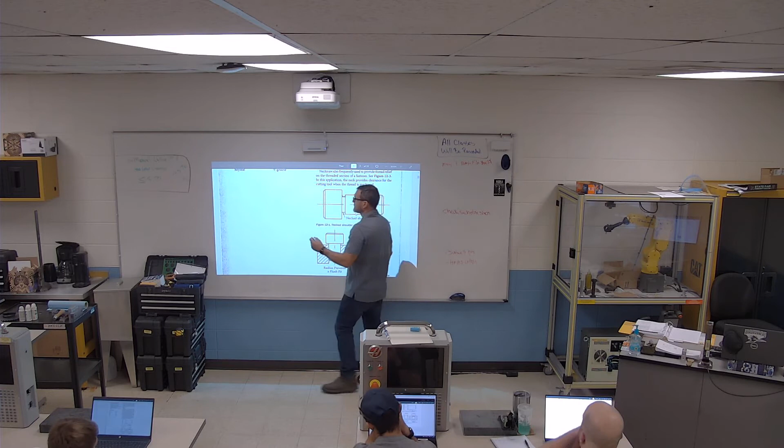That way, looking at it from the side, you've got a plate and it just does a little relief like that, so it breaks over that way. That would be the cavity for a punch head, for example. That way when it went in or came out, if it had a little radius, it still sits down flat. Is that what you're saying?

Yeah, except they put the radius on the inside corner of that counter bore as well. That way you don't have to worry about it creating any clearance issues. Radius on both—too much or whatever. So adding a radius leaves some great strength qualities.

So there are several different reasons why you want to put something in there. Now, a lot of times on the print that we're working with, it's got really good clarity as to what they want you to do.

So this says 125 wide groove by 125 deep. Just by looking at that, do I know if it's saying 125 smaller on the diameter, or 125 from here to here? It's saying 125 from there to there, from here to here, yes.

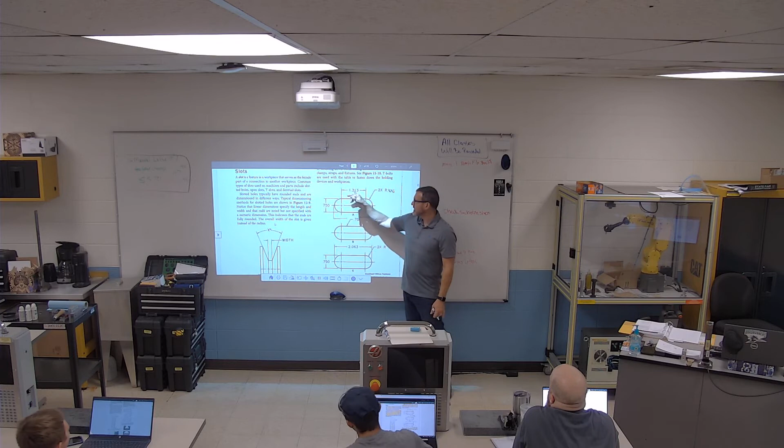Half of 750, right? It would have to be half of 750. So your radius, 750 divided by 2, is 375. So they didn't have to put it on the print, right? They're showing you that it's radial on the end - you know it's full radius, so 750 means 375. Take 312, add 750 to it, that's how you know what your overall length is.

Okay, so there's just an assumption of you knowing how to do the math on these kinds of things, and you shouldn't have to go to somebody and say, hey man, I'm not sure how wide this is supposed to be. They're gonna look at you and go, really? Because it's right there, you know?

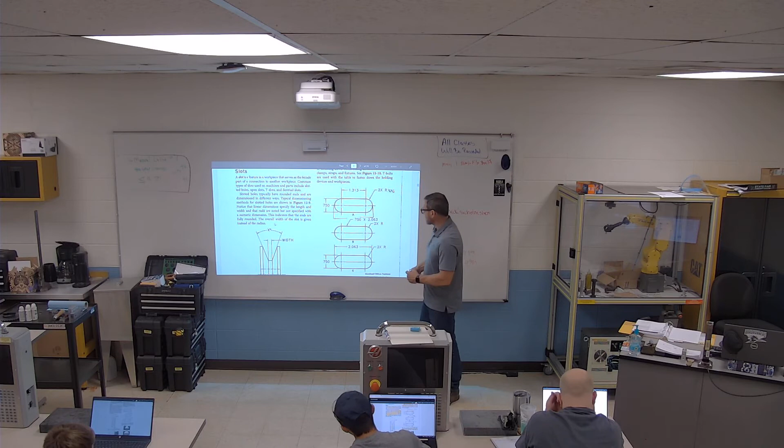Now, you can see it sometimes the other way. Let's look at the bottom one here. I'll pull it up just a little bit higher. So now, still 750 wide, overall length is 2 inches and a 16th, full radius - now I know my full length on it. So same information, just a different way to present it.

So how your person that you're getting prints from does the designing matters, and you'll start to figure out the style that people have.

All right, a groove like this that'd be cut on the shaft - just some type of profiling tool is going to be turning this out. Sometimes a form tool, but oftentimes not. A dovetail or a T-slot, there's a special cutter with the shape of the dovetail or T-slot that creates that.

You have to go in first with the normal end mill before you go in with your T-slot cutter. Your T-slot cutter does not have cutting edges in this area, so you need to come through with a straight end mill first, then T-slot out this section.

I have seen people run the T-slot cutter up to the end of those cutting edges to that diameter, and they're like, this thing won't cut anymore. And I'm like, is that a serious statement? It's just like round hardened shaft up against the part. I'm like, dude, you gotta slot that thing out first. And they're like, oh my gosh, I knew that. I'm like, okay, that's cool.

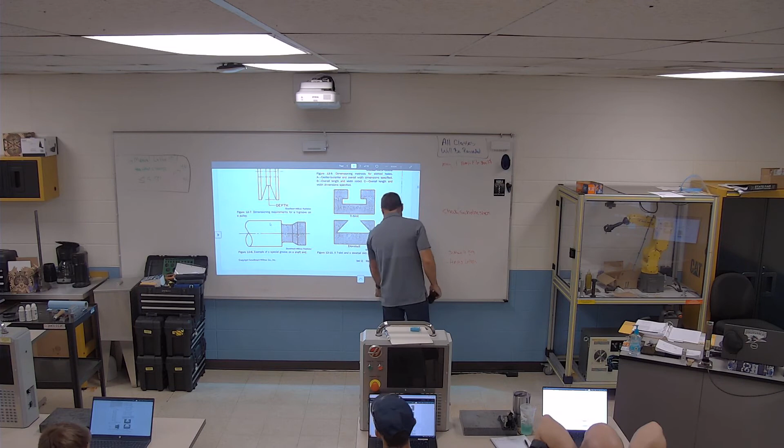Same thing here. You need to slot this thing out with a square end mill, and then come in with your dovetail cutter and create the dovetail from there. All easy mistakes to happen, especially if you're in a hurry, but you want to make sure that you're grabbing those things as you make those.

Several different dimensions can be put across there to help you understand that. So here's a key seat keyway. Key stock is typically bought, so it's a purchased item rather than something that's made.

Sometimes you have to make a step key or some type of modification, but typically key stock is made in a certain way. It's a really, really low carbon steel. Why would it be made that way? So it's cheap. Why would it be made cheap? So you can replace it easily if it breaks.

If you want it to break, right? If there is a break point, that's what you want to have happen. If that shears, it saved you from having another problem. You figure out what's going on, you replace the key, the cheap part, you're back in business again. Same with keyway, coupling, something like that - built-in breakpoints, those are important.

So key stock is typically something we'll purchase, not create. A key seat is something that we're going to mill into the end of the shaft. Keyway is going to be something that is a shape that is put into a shaft. How in the world do you think you get a shape like that into a shaft?

With a broach - sure, broaching would be a great way to do it. You can mill it in too, I guess, kind of, depending on the width or the depth. Yeah, depending on the sizes you were working with, you could do some type of milling operation.

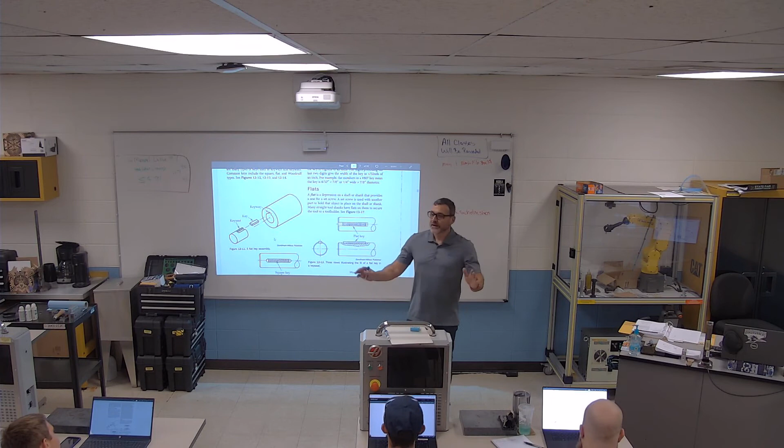It was still cool, we totally thought, it was like a year ago you just invented a car, and you're like, check it out, it's got an engine and wheels, and everybody else is like, a car? No, that's a horseless carriage. You're trying to explain to them like a car, that's existed forever, and you're like, well, yeah, you could call it that, and then you're like, oh my gosh, these already exist.

So anyways, you're talking about having your bubble burst. We definitely had it burst that way. But it's a great way to do it.

So if you can do it right there on the machine, what you're always trying to do is get parts off with the least amount of touch, the least amount of operations that you can do. The great thing about doing a keyway on the lathe is you usually don't have to worry about centerline issues, it lines up pretty good. It's just a really smooth process.

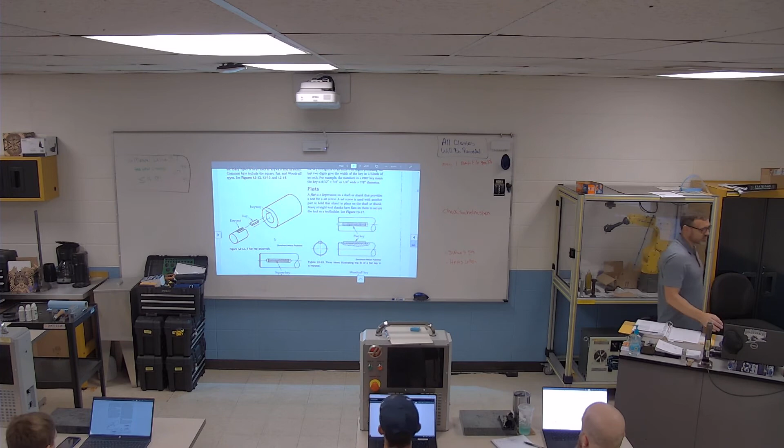So some keys will be trapped inside of the shaft, some keys will have an entrance point from the end of the shaft - that's the difference between a keyway and a key seat. Your keyway, or your key, does not have to be rounded on the edges. It can go into something that's got rounded edges. That keyway is pretty insignificant as far as details. It just needs to function.

Woodruff keyways, same thing, they're a little bit different. You really need a Woodruff key seat cutter for that, a special cutter. They're typically identified by numbers, 1, 2, 3, 4, 5. A lot of times you're going to see that on an electric motor shaft - that's where you're going to see that keyway a lot. Same thing, the keyway is meant to break so that you don't destroy the motor or the shaft. It's the weak point in the whole system so you don't have a bigger problem.

All right. Skip over - there's not a really good example there, talking about bosses. There's nothing that really shows a great example of a boss. I mean, this is... okay, that's not exactly what I was looking for, though.

So anytime you have an area that protrudes up higher than the surface of the part, that's a boss. Think about an island on a part - it can have a hole in the middle of it, or it could just be this raised up area. That's a boss that sticks up from there. So you've got this slot going down inside. It can be all the way through, or it can be contained like a little swimming pool where it holds something inside of it. So a slot and a keyway can be the same thing.

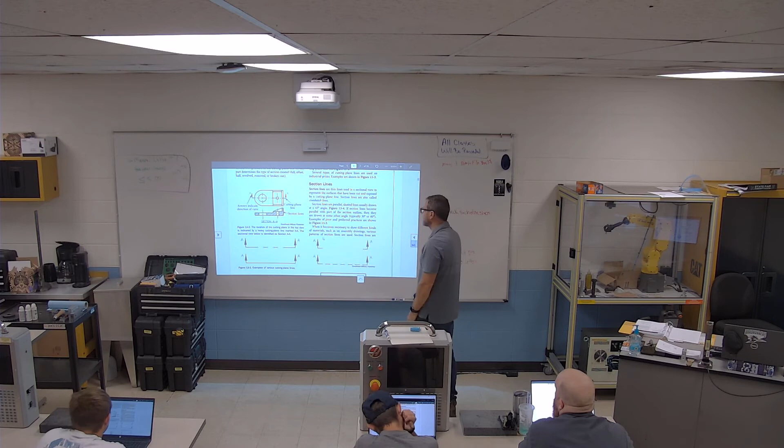Make sense? Okay, so you're gonna see a couple of different ways that you can section things out, but something like this will be pretty common.

If it's sectioned out one time, it's section AA. If it's sectioned out 2 times, it's section BB. So 2 different sections - what do you think the third one is? CC, yeah, and it keeps going, right?

So it's just to help you identify which section view am I looking at. Typically, features look different from each other, but sometimes features can look pretty similar, so it's about knowing kind of where that is and tracing that thing down. Here's just another section view.

So here's what I'm talking about when I'm talking about these different lines that run through there. They can see there's different styles and shapes: gray cast iron or general purpose, steel, rubber, plastic, electrical insulation, titanium, or a refractory metal.

Marble steel, or marble slate, glass or porcelain, zinc, lead, babbitt. Babbitt - anybody know what babbitt is? I will give you 50,000 non-credit bonus points if you even just guess at what babbitt is.

Mix between copper and iron, maybe? Half right.

Anybody ever taken an engine apart, seen like the main bearings or cam bearings, stuff like that? Yeah, so that's not it, but that's what they used to be. Okay, so it's a solid kind of an aluminum brass, so that you can spin on there.

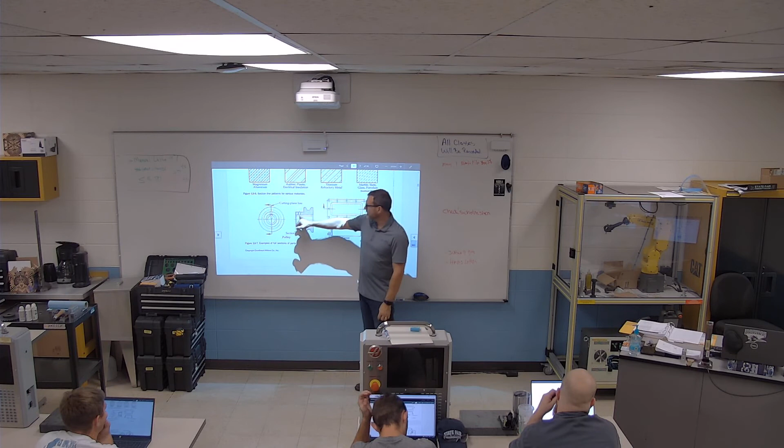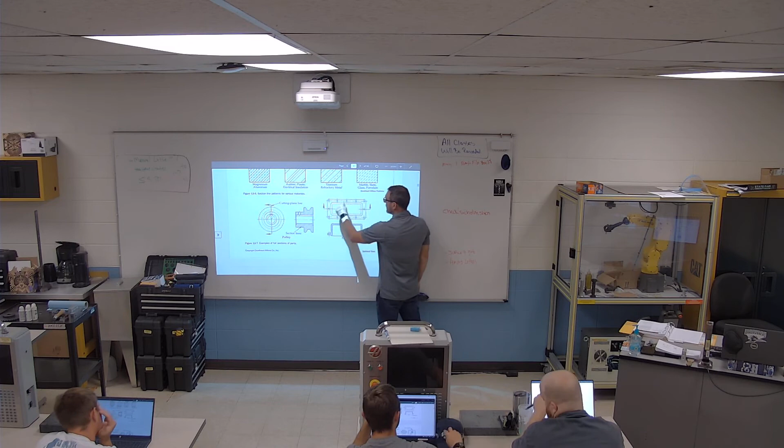Again, here's a section view. You're seeing this side. Okay, so what you're seeing here is this part of it. Section views are super common. You will not see any kind of section view stuff in 101s, but as you start to progress, by the time you get to some of our upper level NIMS parts, you'll start to see some section views in some of our parts.

Offset cutting plane is a great way to get yourself super jacked up looking at the print. See how this does not go straight through there? It's kind of jig-jagging through there, so that you can still see all the features. Because all those features would still be there in 2D view, but just the cutting plane is just not straight through. So just because everything's not on the same center line doesn't mean that it's not there. So you need to make sure that you're paying attention to those offsets.

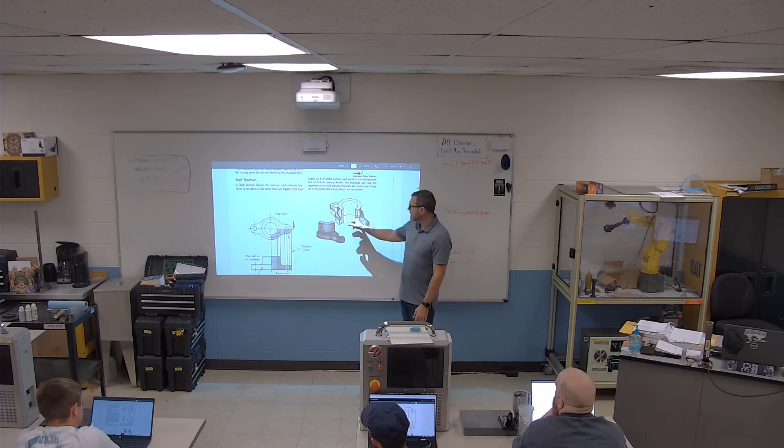If you're lucky, you could get something like this with this isometric offset, so you can kind of see the cutaway into it. Or they have this half section cutaway in there. So cutting a part in half is called a full section view. Cutting a part into a quarter is, I've always felt like that was a little confusing, cutting a part in half is the full section view, cutting a part in a quarter is the half section view. So half is full, and then full is, or half is a quarter.

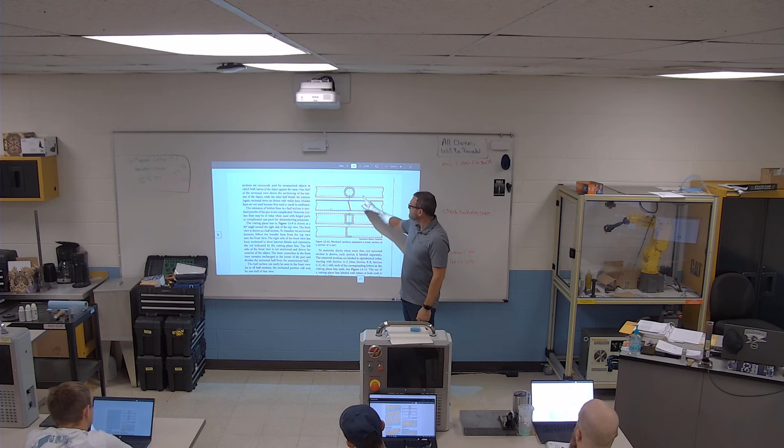When you have section views like this, looking at all of these things, they actually kind of look like belts and belt buckles, don't they? I never thought about that until I just looked at this. So what this is telling you, if you look at whether this is a Z channel, rectangular, angle, or round, if you're just looking at a 2D view you can't tell. This shows you this is tubing, this is Z channel, this is rectangular stock, and this is angle, so you can see that from the part you're working on.

Here's a pulley. You can see from this section AA that this section is I-beam shaped, so you have an I shape that runs through here. Section BB is round, so that's probably a casting or forging.

All right, so what am I looking at on this part? The plunger looking device in the center of the row below it. Okay, so on this section here, what do I got going on? Are these slots here, keyways through there? They're holes, right? So you've got 2 holes going through there, and a hole that runs up and down through there. So yeah, you've got some holes running through that part. It's a matter of being able to see what some of that breakout stuff is.

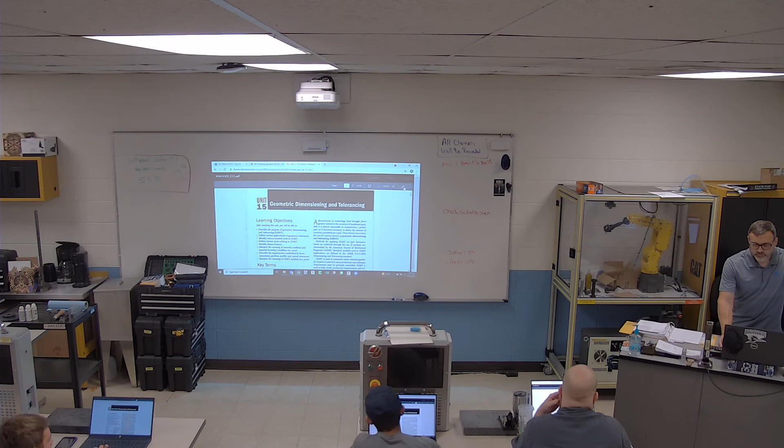This will be, so we'll end with this today, but we'll start with this probably Monday.

GD&T, geometric dimensioning and tolerancing, is something that flows through the rest of what we do throughout the semester. It's one of those things that I think every shop does, but doesn't do well. The shop I came from, we would say if we weren't sure about what the part looks like, or weren't sure about the function or the feature, make it better than what it was supposed to be.

We talked about that before. But geometric dimensioning and tolerancing will help you make parts more accurately, and you should have more parts go through. You should have less scrap if you pay attention to what your GD&T says, because it's actually not saying you have to have perfect parts every time. It's saying, does it fit and does it function, and is it the right form? So form, fit, functionality is what GD&T is really comprised of.

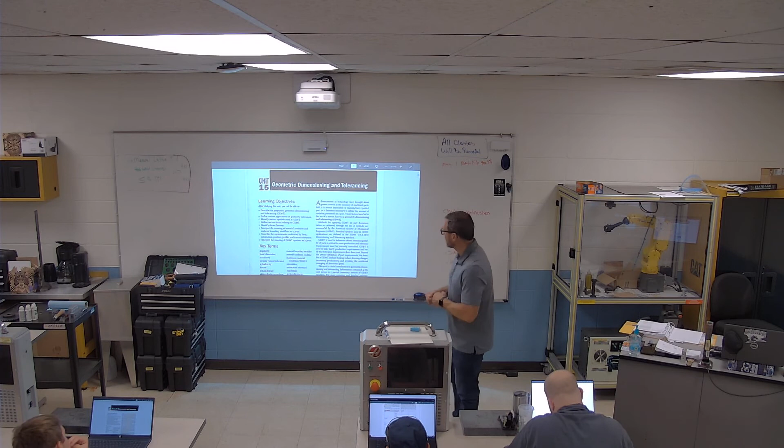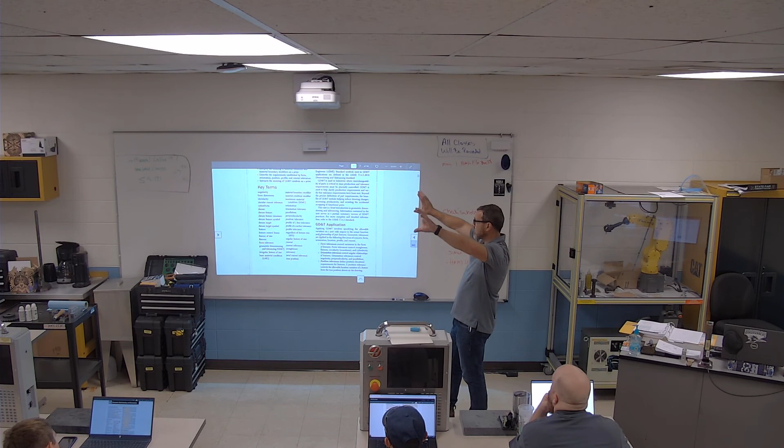So we'll at least do a high level overview of it today. There's a ton of information about it. You have angularity, you have basic dimensions. Basic dimensions on their own have no tolerance to them at all. Circularity, circular runout, cylindricity — cylindricity would be that something is the same size on both ends of the circle. Datum is a feature point — datum features and datum feature simulators, datum feature symbols, datum target symbols. Features, feature control frames — feature control frames is kind of the roadmap of what we would know to do to a feature, a hole, a keyway, a flat, a corner.

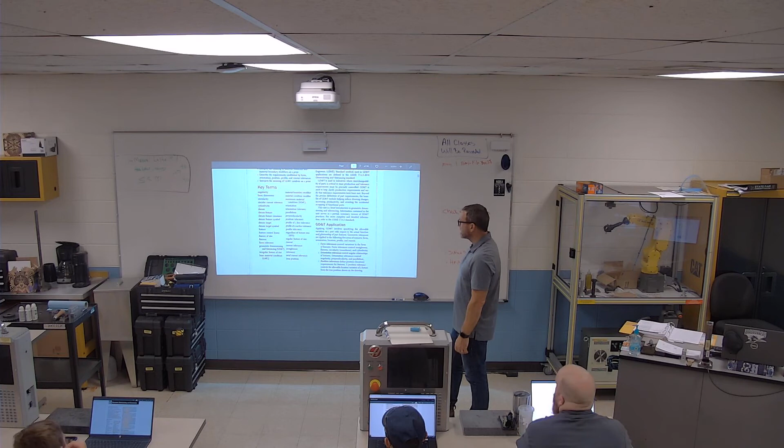Feature size, flatness, form, least material condition and maximum material condition, orientation, parallelism, perpendicularity, positional tolerance, profile of line, profile of surface, regardless of feature size, and then regular feature of size, runout tolerance, straightness, tolerance, total runout or TIR, and then true position. Some of those things will kind of flow into each other. Some of them will be total standouts from themselves or from the other ones.

So when we look at form, orientation, position, profile, and runout, there's really about 14 symbols that are the most primary components of GD&T. Straightness is a feature straight, regardless of anything else that's going on — is the hole straight, is the line straight, is the shaft straight, is the dimension straight.

Flatness cares nothing about anything other than is this surface flat. It doesn't care about squareness, it doesn't care about perpendicularity, so it could be crooked, but is the surface flat? What happens when we start to look at flatness is we start to say, well, how flat is it to this, how flat is it to this, but we're mixing up terms, so we want to make sure we're staying with correct terminology the whole way through.

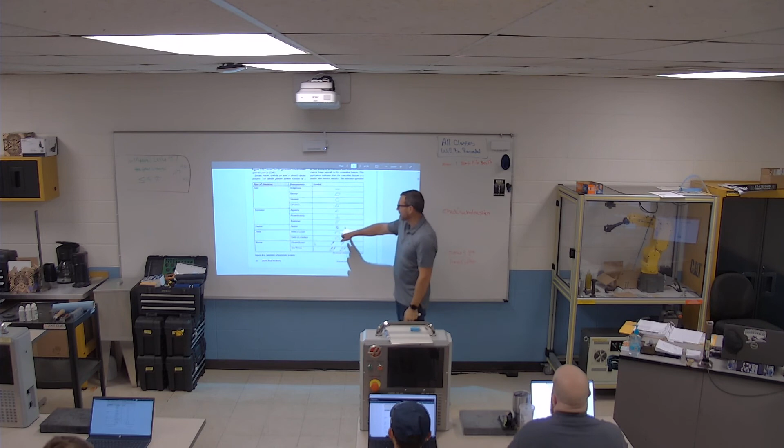So that's when we start to look at position, positional tolerance, and true position. Profile of the line is the waviness of a line or surface, so we're looking at the highs and lows of it, not just the average. Circular runout and total runout for us will be practically the same thing. I might call that TIR, or total indicator runout.

If you're working on a lathe, and you will be working on the lathe, if you turn one side of something and then turn it around, chuck on it, and start machining on that side, you oftentimes don't have concentricity. Because that only works if you indicated two diameters, or a diameter and a face, in order to make it square and parallel, or square perpendicular, so that things would be concentric. When we just slap it in the chuck and flip it around and slap it in the chuck again, we get this cam kind of thing. Or if you've turned two diameters and they don't match up right, hoping that they do, like you're turning an inch and a half and an inch and a half, it's like shadow, like highs and lows on there. Concentricity is total indicator runout.

So you put your indicator on there, and you're like, well, the shaft I just turned is running true as a string, but the shaft that was already turned before has 8 thousandths runout. So your total indicator runout is 8 thousandths. When we turn shafts or parts on the lathes, we care about center line or concentricity, because now that part that's got 8 thousandths runout is 4 thousandths off center line. It's probably going to be a problem for us. So we want to make sure that we know what our circular runout and total runout tolerances are.

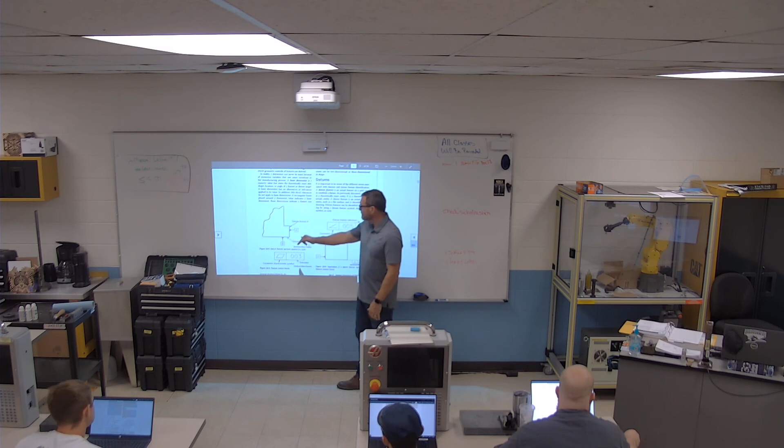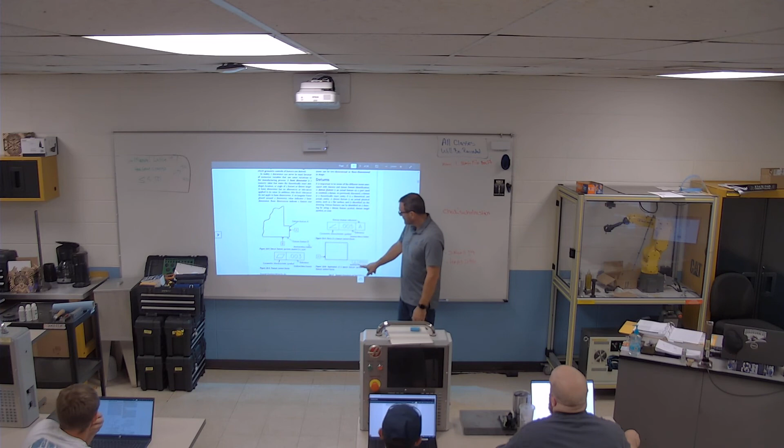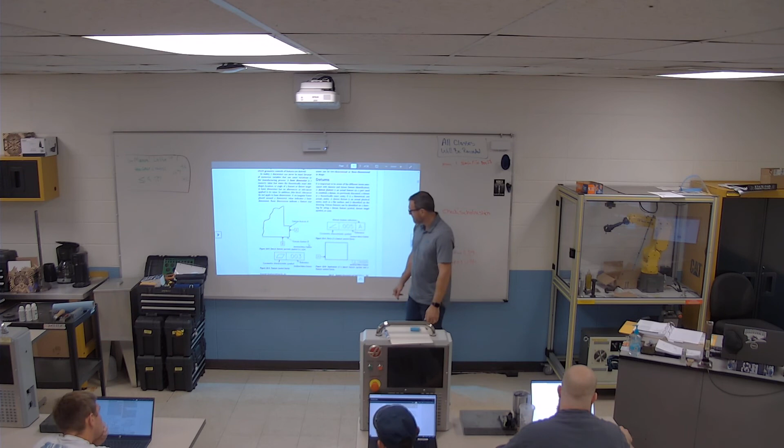Here we're saying something has a perpendicularity tolerance of 5 thousandths to A. This face needs to be perpendicular within 5 thousandths to datum A. Here's datum A, this surface perpendicular to this surface, no matter what size that happens to be. Now, in my mind, I don't know that I love that, because as this part could grow or shrink, 5 thousandths means something very different. So sometimes I would maybe say that would be better for an angular tolerance.

Geometric characteristic of parallelism of 3 thousandths. That part's got to be parallel within 3 thousandths.

Let's go past some of these things. Let's go to maximum material condition, and at least material condition as well. These are maximum material condition modifiers. So when we're talking about MMC, it'll be in a feature control frame as well, MMC and LMC, which is maximum material condition, least material condition.

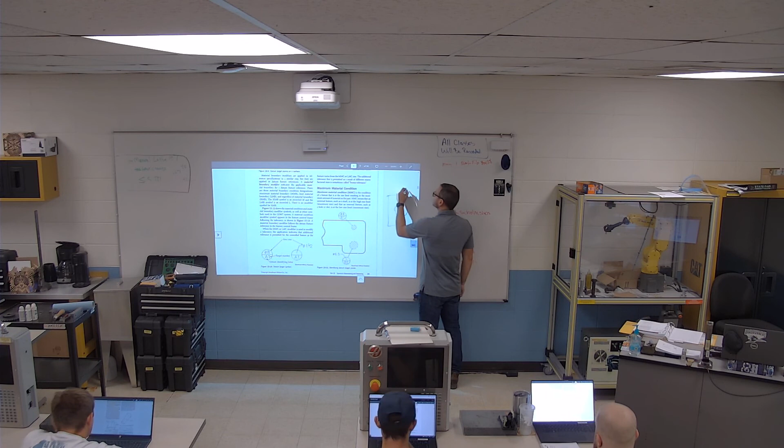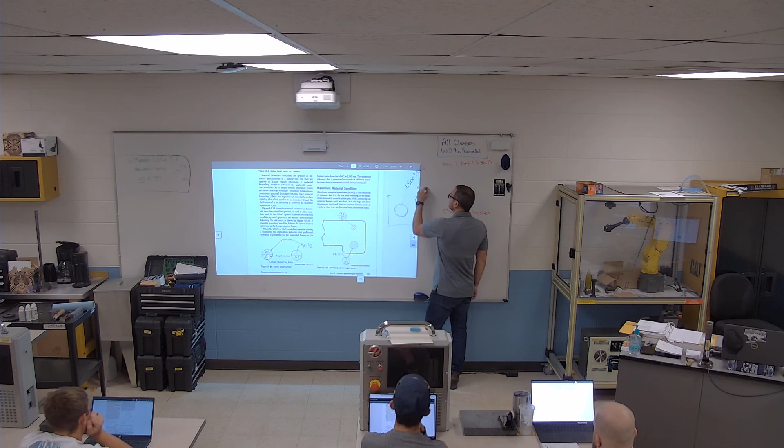Maximum material condition on a hole would be the smallest that it could possibly be within tolerance. So if you have a hole, my maximum material condition is 1.495, because it's got the maximum amount of material that could possibly be in it. That's my maximum material condition. My least material condition, my LMC, would be 1.505, to get the least amount of material in it.

If I am at a maximum material condition, being the smallest size, that leaves me with a lot of room to do some stuff. I can shift that hole if I need to, I can move it, I can tweak it. If I'm already at my LMC, I'm kind of screwed, because I have to start going bigger, which means taking it out of tolerance.

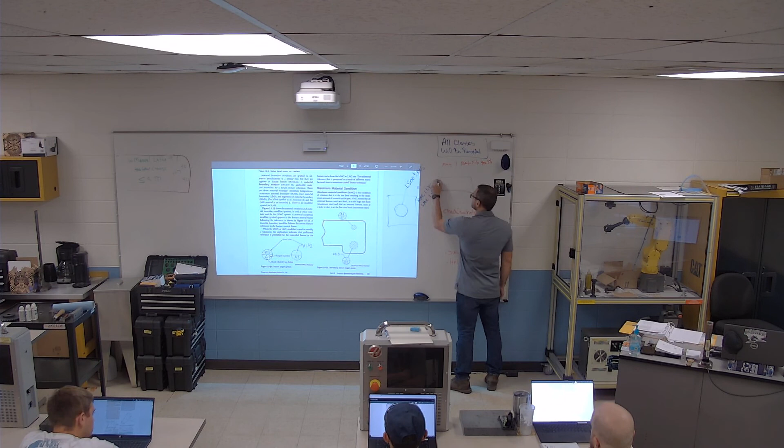Now, GD&T oftentimes gives you something called bonus tolerance. If my feature control frame said that this is A, and that this is B, and that positionally I needed to be within 5 thousandths to A and B, and I'm already at 505, I've got a little bit of a problem.

But what I can do is take this 5 thousandths and start to stretch that diameter out by at least half of that, gain some bonus tolerance, and kind of split the difference on where some of those problems are. So I'm at 505, I'm out a little bit positionally, I might go up to 508, and then squeeze it just a little bit over to one side in either X or Y, and be able to bring myself back into where I need to be.

This is really going to help you save a part from being scrapped, and it's going to matter a lot to you if you start to think about those things. What students do a lot - you guys who have already been machining with us see this all the time - is: I'm making my part, I made something wrong, what do I immediately do? Scrap it and start over. How many of y'all have done that? Just made something, immediately went to scrap it, started all over again.

And what you ended up doing is throwing away a part that was like 90% good, that could have been shimmed, plugged, modified, you could have tweaked a dimension somewhere, but what you said to yourself was every dimension wasn't right. But GD&T is saying, is the overall functionality of the part still good? Does it still do what it's supposed to? And the answer is yes.

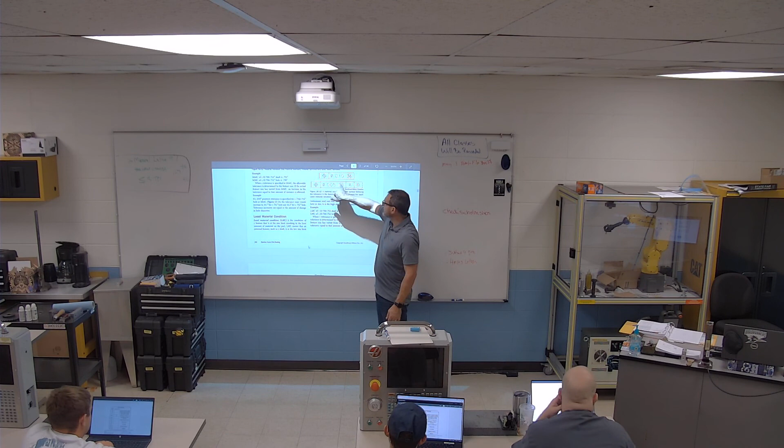So this would be symbols for maximum material condition, true position with 10 thousandths, maximum material condition, true position 5 thousandths, maximum material condition to A and B—so those two datums on there. Here's just some examples of how that works in moving some of those parts around and gaining some free or bonus tolerances there for you.

Okay, so straightness and flatness. And then let's see what else we can look at—flatness and flatness, or parallelism symbology. So here's how circular this is, how round this is—we talked about that a little bit. We talked about cylindricity some, and these are just the overviews of this; we're going to see more of this as we go. Angularity—angularity has more to do with the surfaces rather than just the pure angle of it.

So like on a part like this, it calls out to be parallel within 2 thousandths. And so what we might find is this is dimensionally correct here and here. This wall might be straight, this wall might not be straight. We'd probably come in and fix that before we'd go in and just destroy that thing and pitch it. So you want to make sure you're really taking the time to do good inspection on parts.

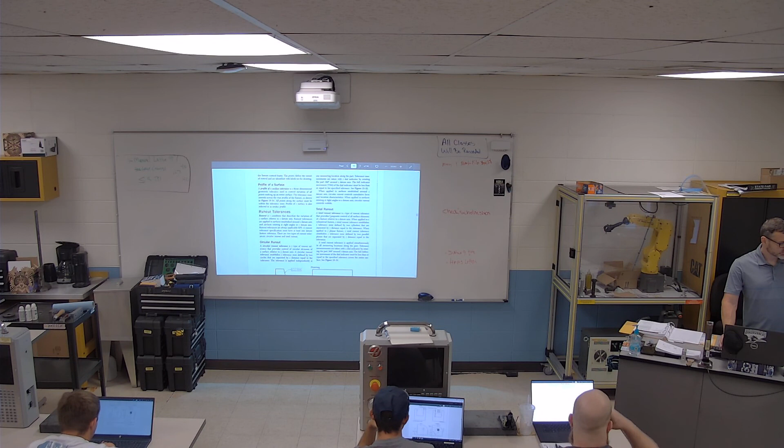Some of that stuff isn't going to work for us—we'll take care of that. We've talked about that. Man, you guys are blowing through this.